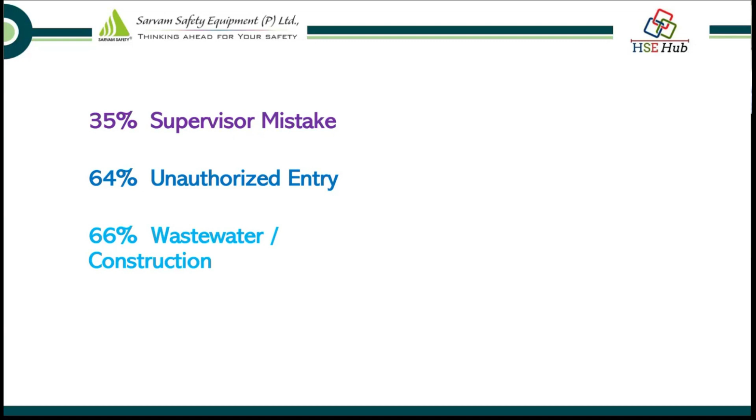64% is unauthorized entry - they are not supposed to enter, but they want to finish some job, so after the job only the production or whatever the company will work. So that unauthorized entry is 64%. And construction and wastewater - wherever the sewage water or water treatment plant - 66% happened at wastewater treatment plants and construction. 78% is a little shocking - oxygen deficiency and IDLH level.

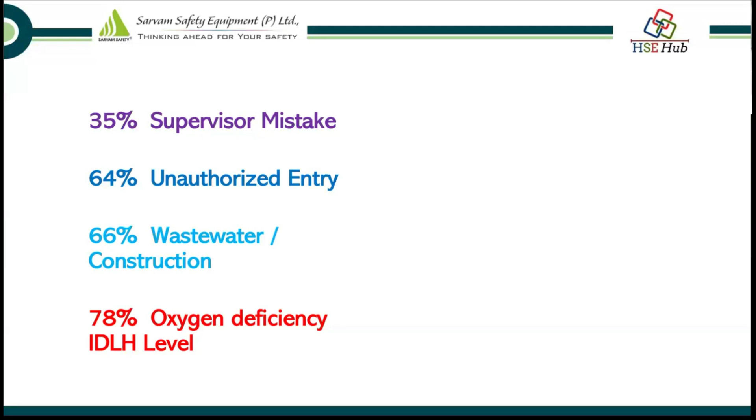So we are going to talk about what is oxygen deficiency and IDLH level, how it affects a person in confined space. And this is one part of the causes - there are other parts of the causes. It may be very simple to listen to, but that is the reality.

Almost 95% - people have died because of not education or poor education, no confined space training. The people who enter confined space must be trained, they must be competent. In fact, our Indian Factory Act also says, section 41A, the person should be a competent person. Competent person is not only certification or papers, he should be really trained to enter the confined space. So 95% it is death because of improper training or no training.

In fact, there are many accidents. I will quote some. There was one hotel near North Madras.

They needed to clear the sewage treatment plant before customers started coming from 6:30 in the morning. So they called some laborers, blue collar workers, early in the morning around 5:30. I will just narrate the incident. Before customers arrive at the hotel, they have to clear the sewage treatment. So around 5:30, 6 o'clock, they were not alert enough while doing the work. Suddenly they opened the sewage treatment, entered the tubes to take out the sewage, but a poisonous gas attacked them and they died.

They don't know what to do. They are very much skilled at their work, how to open the manhole, how to put the hose and all, but they are not aware of the hazards. This happens in many industries. Since people attending are from industry, I don't want to quote any industry openly, but this kind of thing is similar.

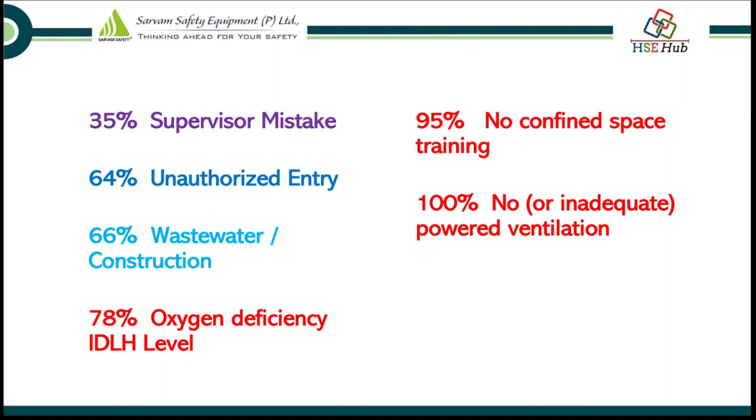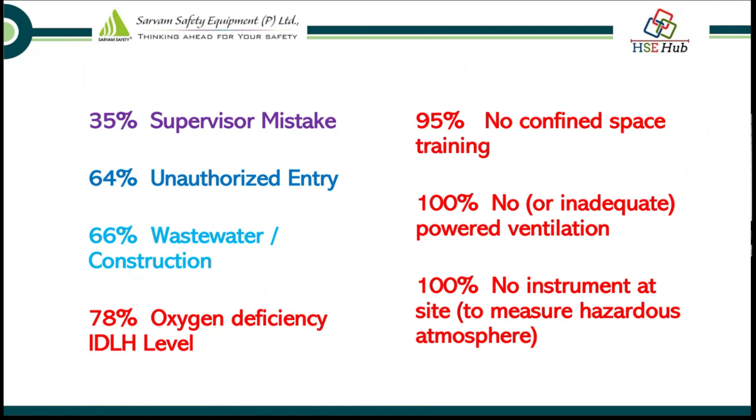100% of cases involve no or inadequate ventilation, and ventilation is very important, we will discuss that further. Also 100% involve no proper monitoring, no instrument at the site. There's no monitoring for oxygen, no monitoring for combustible gases or other toxic gases. These are the major causes, 6 causes, contributing to confined space deaths.

Let's understand the definition. In case you have any clarification, please post it or make a note, and at the end we will definitely discuss it.

Internationally, OSHA classifies the definition of confined space. First, it is a large enough space for a person to enter - it should be big enough, around a 6 or 7 foot person, with their body or 3/4 of the body able to enter into the confined space. Second, it has limited or restricted entry and exit - it is not an easy way to walk in and walk out. Third, it is not designed for continuous operation. So there are 3 clear definitions of confined space: large space for a person, limited and restricted entry and exit, and not designed for continuous operation like a workshop floor or office.

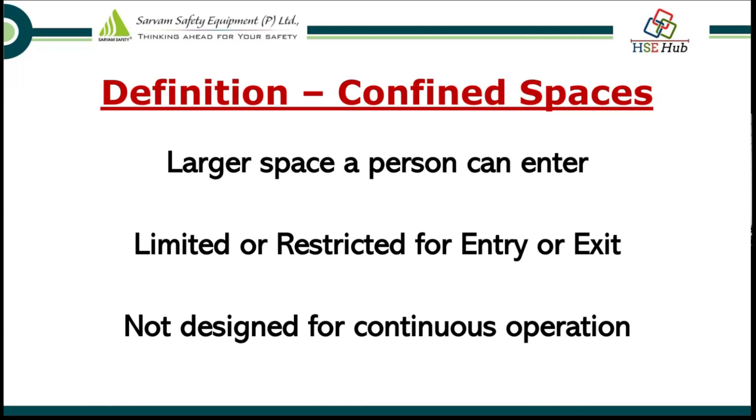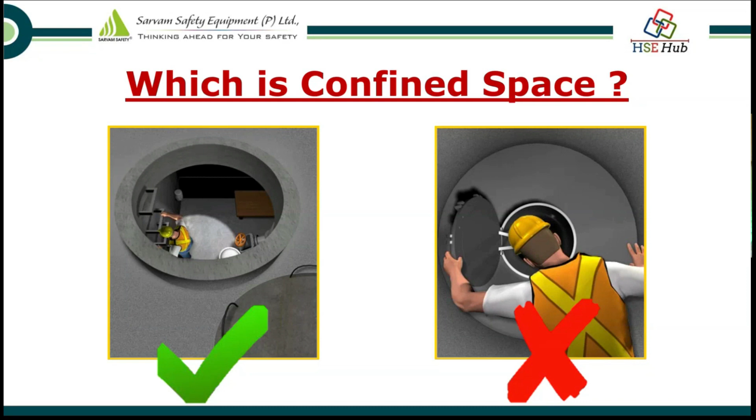Let's see some examples. Here I am showing 2 pictures - one is a manhole, the other is a viewport or process reactor. The left side picture is a confined space because it meets all the categories: it is large enough for a person to enter, there are steps provided, and since it's a manhole with a circular opening of about 1.5 to 2 feet diameter, it has limited entry and exit, and no one works continuously inside. The right side picture is like a process reactor where a person can't enter inside, so it doesn't meet the criteria. This is how we can identify in our industry which is a confined space and which is not.

And in the confined space also there are 2 categories: permit required confined space and non-permit. See, now the standards are very clear. We are at par with the global community, global standard. But if we implement all the things to the entire confined space, what we assume as a confined space, then the process will be very difficult, because not all confined spaces have all the hazards. So they divide it into 2: permit required confined space and non-permit required confined space, right? So that is the thing.

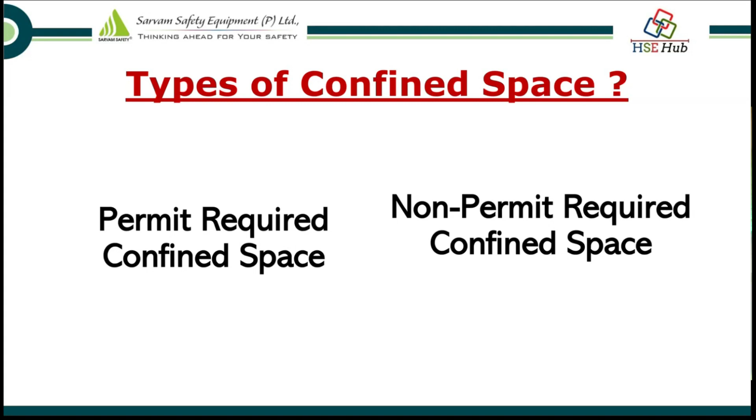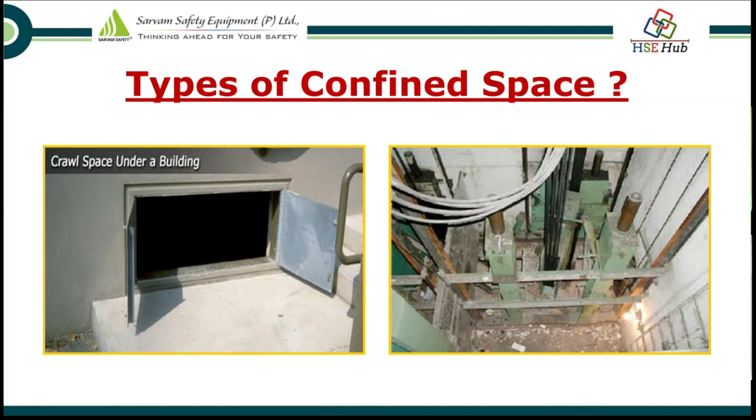So what are the permit required confined space qualities, or what are the criteria? Permit required means highly dangerous, the deaths we saw, that 95%, 65%. Okay. So, it contains the potential to have a hazardous atmosphere. So, what are the hazards? That atmosphere means it may kill a person. That is a hazardous atmosphere. We will discuss a little bit more.

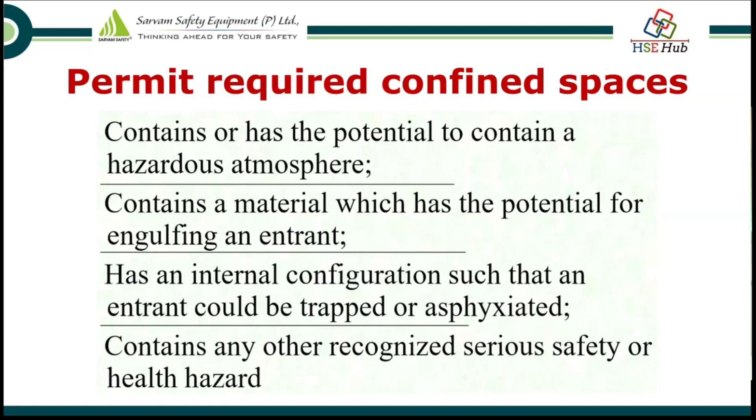And it contains material with potential for engulfment. The person can get trapped inside. The person who enters the confined space is called the entrant, and they may get asphyxiated. Okay, that is, oxygen may be deficient, and there may be other serious hazards. So where there is a health hazard, toxic and flammable, or some creatures like a snake or cobra may get inside, that is called a permit required confined space.

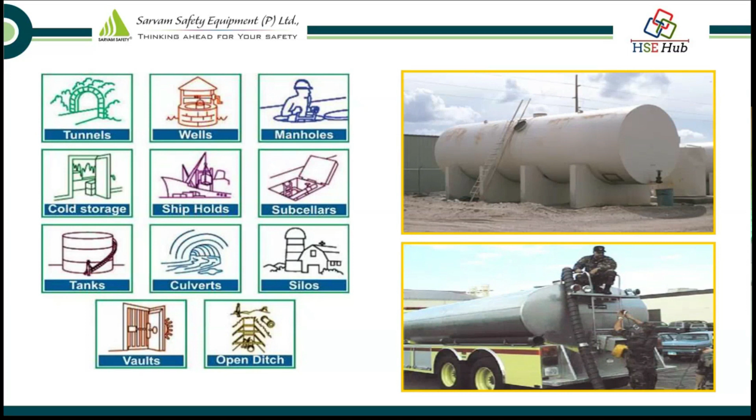So these are the examples: tunnels, wells, manholes, cold storage, these kinds of tanks. So these are permit required confined spaces. Means there is a risk for life and health, not only for the person, but for other persons also. And there are non-permit confined spaces, meaning they do not have that much hazard potential, but we need to have some minimum safety requirement. It will not make a person die. It is not a fatal hazard.

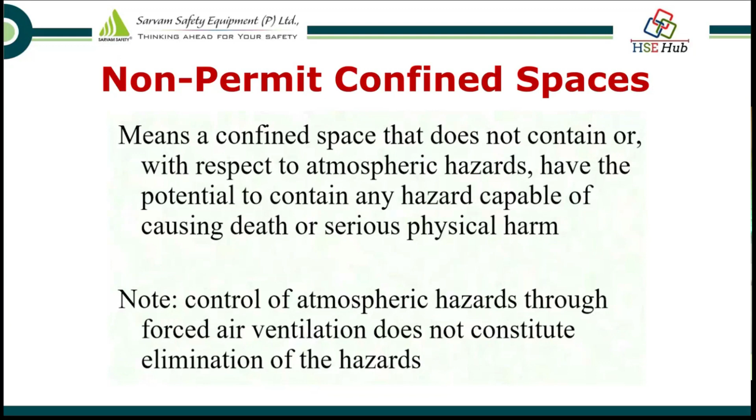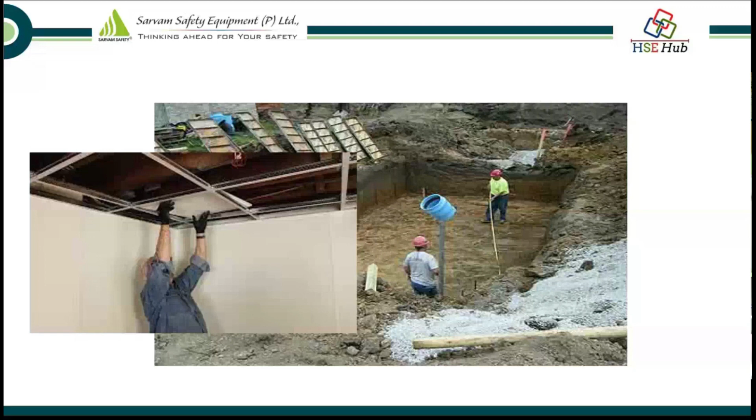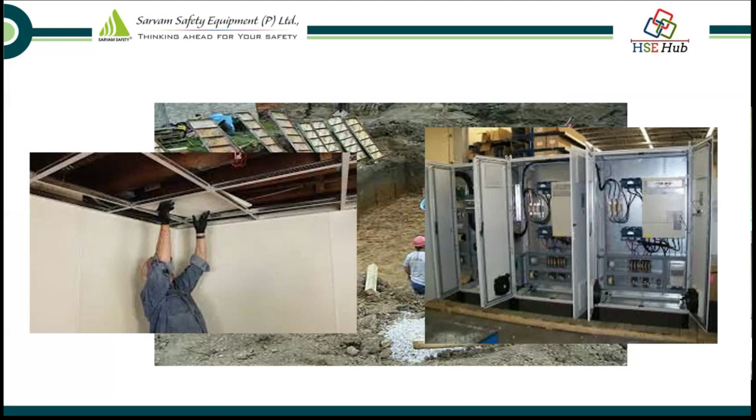So that is non-permit confined space, like this open pit, right? Or false ceiling. Where we go inside the false ceiling and work, that is also confined. Confined means it is completely covered, but it does not have the health hazard to the extent a person can die. Again, like a large electrical panel, I'm just showing for an example. So even though it is confined and closed from all directions, it is not highly dangerous for the person's health. So this is called non-permit required, meaning not much monitoring is required; with a minimum safety setup, we can enter. That is it.

Okay. Now this is a very critical question. I hope till now you are very clear. We understood what confined space is. We understood the types of confined space. Now this is the question: what is meant by confined space entry? Whether the person is near or inside. I'm going to show three pictures, which will make it very clear.

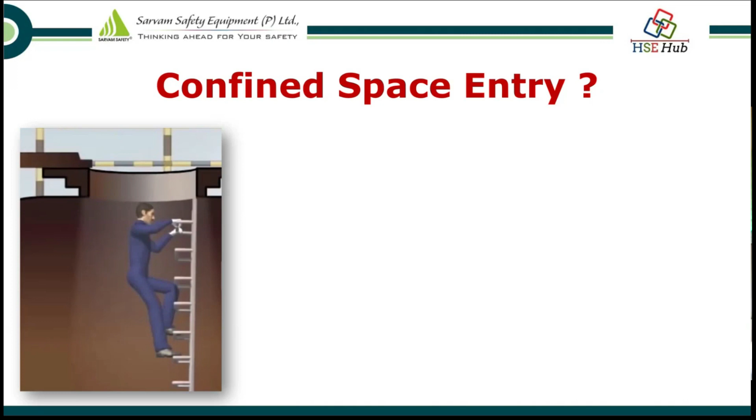So very clearly, as per standard, all three should be considered confined space entry, because all are vulnerable to get injured in the case of a permit required confined space. If a person enters fully, if a person enters half, or if the breathing zone of a person is on the opening of the manhole, it is also considered a confined space entry. So when our team has such work, whatever protocol is required for the first person, the same needs to be applied for all the rest of the people, right? So this is the clarity about confined space entry.

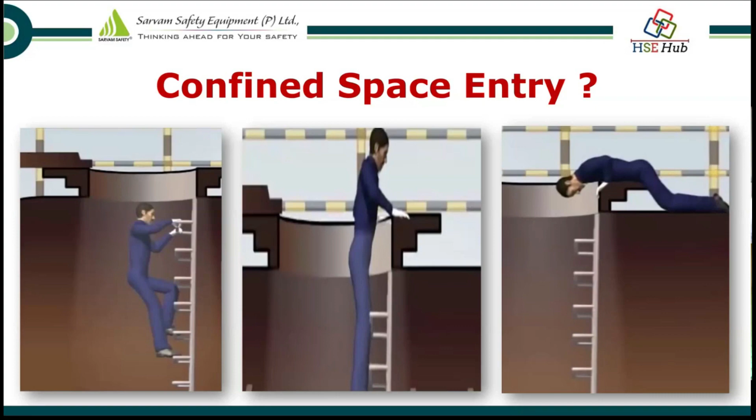Now let's watch one video, and I hope you can watch the video very clearly. There is not much audio, but just watch the scenario. Most confined space accidents follow a similar pattern. Okay, right? I'm going to play the video. Please have a look.

So this is typical of things that happen in almost all cases. This is a similar pattern where a person will go in without any protection, and then the other person will go. So the confined space has many hazards and is associated with risk.

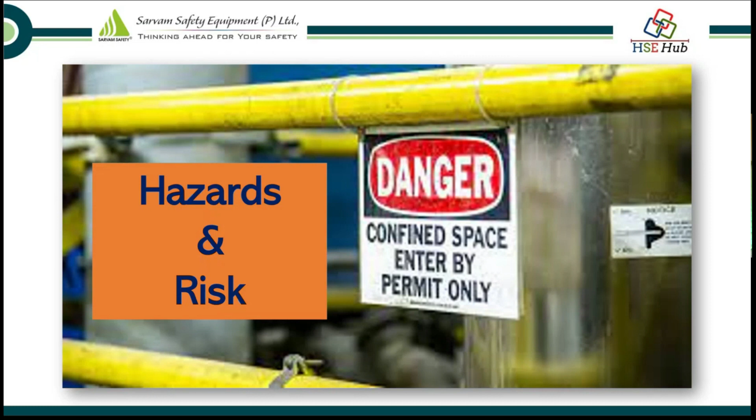It is very important to note that the people had not entered inside; they were taking rest, but suddenly the ETP tank broke and the people died. So confined spaces and similar areas, ETP, STP, all have very life-threatening hazards and associated risks. Let's see them one by one for another 15 to 20 minutes, and after that we go to the suggested solutions. The first one is oxygen deficiency. There is a high potential a person can die.

Why and how is oxygen deficiency happening? It is displacement of oxygen. Inside the confined space, if there are any gases already created whose density is more, they will displace the oxygen. And microbial action: inside the confined space there may be small microorganisms, which also create some sort of gases, or consume the oxygen, or displace the oxygen.

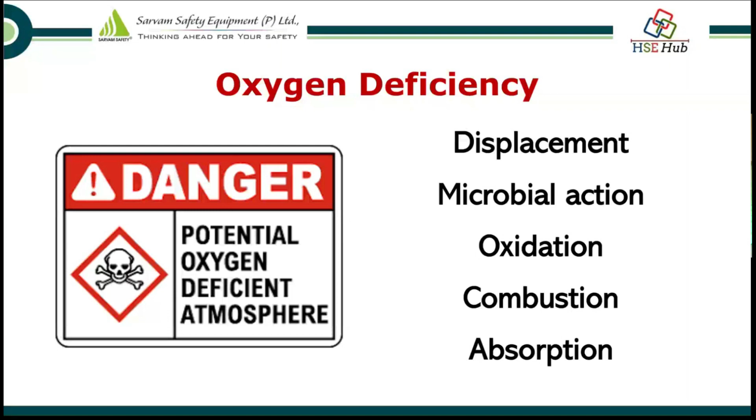Oxidization of metals. And sometimes a confined space or any area which was closed for a long time will have its own gas formation, like methane gas or combustion gas. Sometimes oxygen will get absorbed. So oxygen deficiency is one of the biggest hazards in confined spaces, and it is killing people like anything.

Here the problem is the oxygen may be at the surface level. There were many old techniques to check the oxygen, like sending a small frog or a small chicken inside the confined space; if the frog or chicken lived, then definitely there was oxygen. But those were traditional techniques followed around 30 or 40 years back. Now the latest instruments and a lot of technology updates have come.

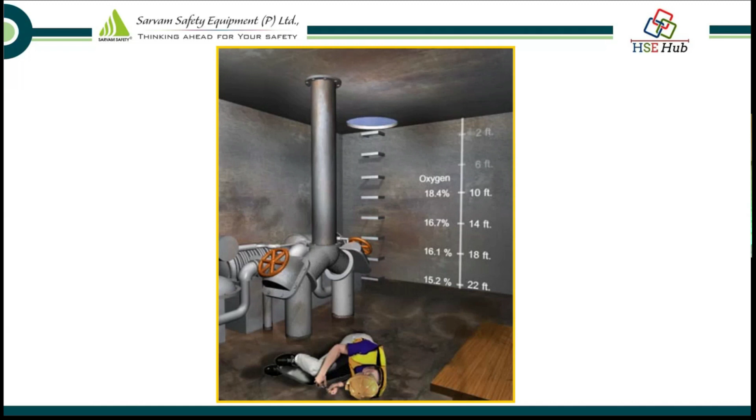Why we need to take great care with oxygen deficiency is that on the surface, on top of the confined space, it may look like 21% or 22% oxygen. The minimum required oxygen for a person to work stably is 19.5%. When the person enters the confined space and slowly goes down into its depth, the level of oxygen will come down. That is why people are not able to live, and people are dying.

Now we see this picture. At 21% oxygen, the person will be normal; he can work and perform. When it is reduced to 18%, the area temperature will feel increased, he will not be comfortable, and his concentration will be disturbed, so he may need more air or ventilation. When it is reduced to 16 to 12%, the breath rate will increase, up to 25 per minute, and naturally when breathing increases, the heartbeat also goes up. So that is the problem.

The person will not be stable, and below 14 to 9%, he will get headache, nausea, a vomiting kind of sensation, and he will not be comfortable at all. And at less than 6%, the person may die. So this is the impact of oxygen deficiency on the body. To be stable, we need a minimum of 19.5% oxygen.

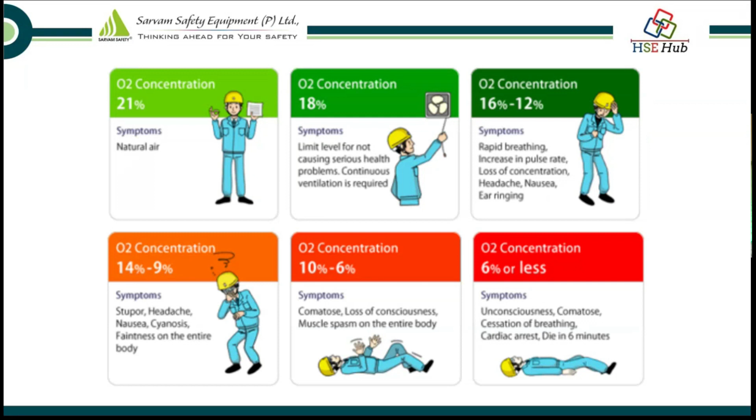So oxygen deficiency is one of the hazards in a confined space. When we are planning a solution for that, we will also plan a solution for the other thing: if the oxygen is increasing, that is also dangerous. Like oxygen deficiency, it is invisible, it is silent. It can create a physical hazard, and it can create a health hazard also. And how can oxygen deficiency happen? The confined space is already covered, and due to microbial activity or other reactions, oxygen will get absorbed.

Then how can oxygen enrichment happen? It is because of wrong ventilation. When we want to ventilate, we need to pump only fresh air into the confined area. But instead of fresh air, if you use oxygen, that area will become an oxygen enrichment area. If there is a sudden small spark or some temperature increase, it can create an explosion. That is the physical one.

And what is it likely to lead to for the person? For a normal person, 100% oxygen will increase the respiratory rate. Just imagine the person's neurons get more oxygen, so they work in a rapid way. So the person will not be stable to work. So one, it will create fire and explosion. The other thing, it will also disturb the person's regular, stable activities. So that is oxygen enrichment.

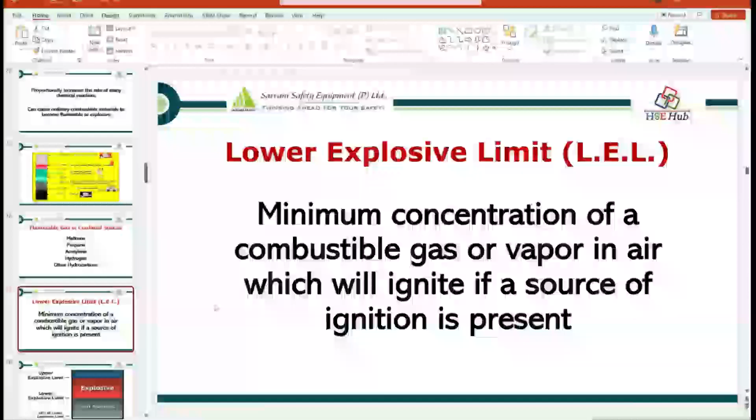Oxygen enrichment. I hope oxygen deficiency is very clear; that is a lack of oxygen. Oxygen enrichment is a sudden increase of the oxygen level in a confined space. So how will it increase? It will not happen naturally; it happens if the ventilation is done in a wrong way, like if we ventilate the confined space with oxygen. So what will happen? If the entire confined space is filled with oxygen, initially it may be comfortable for a person, but at a later stage it will not be comfortable.

What will happen to the person? When a large amount of oxygen, 100% oxygen, enters a person's body, the neurons and cells will be hyperactive, right? So the person will not be stable to take action. He can't speak properly and he can't do any action properly. If it reaches 100%, the person will die. Again, I'm talking about a normal person. A normal, stable person with 100% oxygen may die. Brain death will happen.

There was one movie called Lucy, a French movie. It is actually a different genre, but similar to that: when all the brain cells are activated, what becomes the problem? If someone has watched the movie, we can just relate to that. That is hyperactivity for the person.

What will happen to the atmosphere? When oxygen enrichment happens, a small spark will become 10 times bigger. And in case of any flammable liquids, if somebody has taken petrol or a flammable gas inside for some reason, when the oxygen atmosphere is 100%, it can create an explosion.

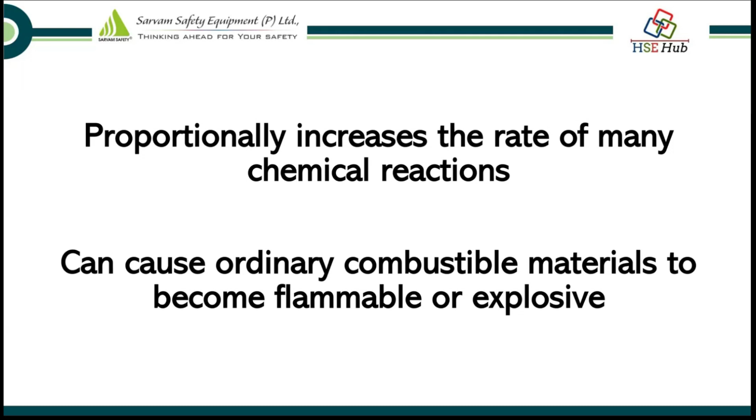Okay. So this is how the oxygen level plays with our body physically also. 19.5% is the minimum oxygen required to perform a task. 21% is normal, that is the atmospheric percentage. Up to 23 it is okay. Up to 25 it will increase the risk of fire, and 100% will damage the brain.

When it is reduced, around 16% breathing will be high, at 12% the person will go unconscious, and below 12% they may reach the coma stage. So that is the problem of oxygen enrichment and deficiency. Hope now it is very clear. Now let's move to the flammable gases. If you have any queries on oxygen, we will discuss at the end.

The flammable gases may get accumulated in a confined space: methane, propane, acetylene, depending on the process. If some area is processing some chemical, hydrogen may get produced. If it is a petrochemical industry, wherever there is a confined space, methane will be the byproduct or a natural formation. So these are the flammable gases in confined space.

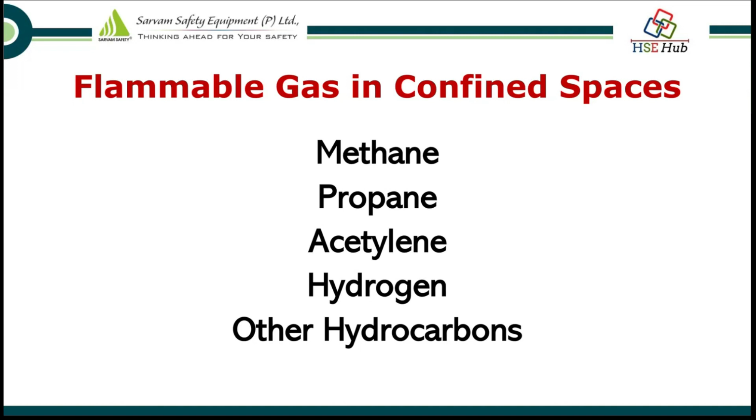What is the problem with the flammable gases? There are some flammable gases with less density, which will be on the top. There are some flammable gases or even toxic gases with high density, which will settle down. So one, there is a risk of fire or explosion, and the other problem is when these flammable gases expand, they replace the oxygen. So that is another problem.

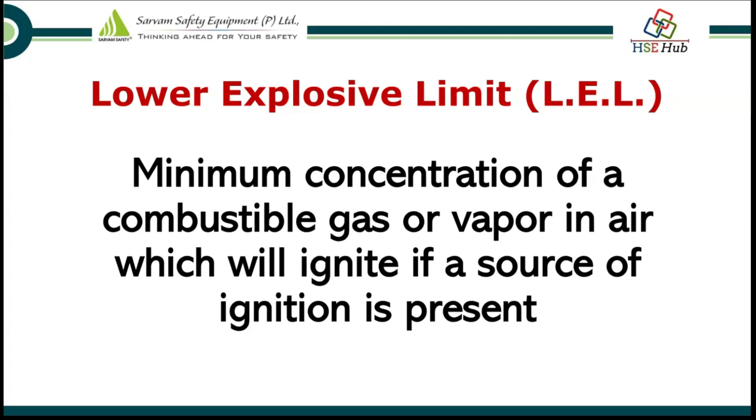And how can it catch fire? There is a lower explosive limit. I hope many of you are aware of it. It is the minimum concentration of a combustible gas: when the flammable gas level reaches the percentage where it can ignite a fire with a heat source. Let's understand a little bit in the next slide.

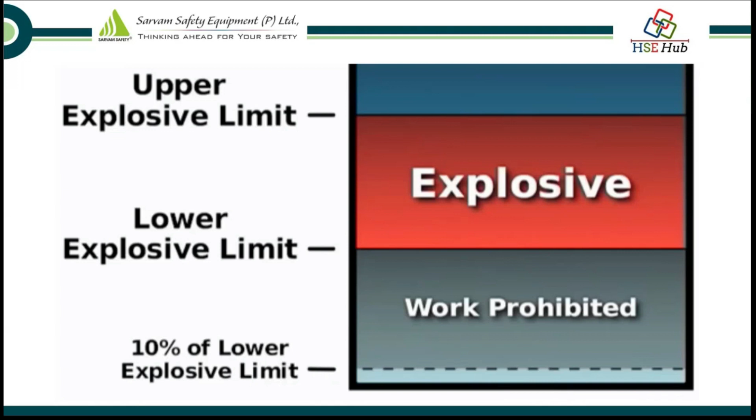Apart from oxygen deficiency and flammable gases, there are some toxic chemicals, first hydrogen sulfide and carbon monoxide, in their different concentrations. To take it in a simple way, all toxic chemicals or toxic gases have 3 different levels. In the first level, we can sense the chemical, meaning we will get a smell. That is called the odor threshold. There is no harm; a person can work without protection for one shift, 8 hours.

Second level, when it reaches the threshold limit value, TLV. When it reaches TLV, the right protective equipment like a respirator is definitely required. Below TLV, not much protection is required; above TLV, protection is definitely required. And the third level is IDLH, immediately dangerous to life and health, meaning the person will die.

So here in confined space, the problem is, see, a confined space has a depth of 8 feet, or 15 feet, so that a person's full body can enter. At the initial surface, the toxic gas level will be very less.

So even if they measure at the 15 feet confined space vessel, if they take the measurement even up to 13 feet, there were no noticeable toxic gases or they are within the limit. But if there is some other sediment or semi-solid liquid at the bottom, if the sediment is disturbed, it will immediately release gases, vapors or toxic fumes above the limit. So that is the problem with the toxic confined space atmosphere.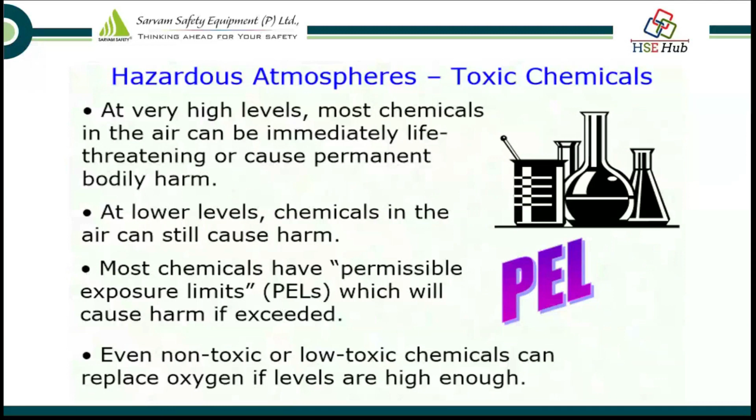See, like a sewage, why are people dying at drainage and sewage? On the top, it looks normal. When they go down, they will feel a little heat, they will adjust. When they go further down, they will get some different discomfort, they will adjust. When they touch the water and disturb it, suddenly the toxic gases come. The person is not prepared for that, and the person will die. So that is a toxic chemical atmosphere in a confined space. And one such toxic gas is hydrogen sulfide.

In fact, for manual scavengers, latest technology has come; they are using tripod and winch. Around 8-9 years back, the government announced that manual scavengers doing sewage cleaning have to wear proper protection equipment. In fact, in Tamil Nadu, all the districts implemented it. I don't know what happened after that. They use electronic gas monitors and advanced breathing systems, because many people have died due to hydrogen sulfide inhalation.

Now let's understand a little bit about hydrogen sulfide. Hydrogen sulfide is everywhere, even in our kitchen waste and food waste. A popular example: when you go outstation for a week, you close all doors and windows. After one week, when you come back and open the door, you will feel a different kind of odor. That may be hydrogen sulfide, created if the kitchen or food waste is not disposed properly. At a small stage it will not create problems, but when the level of hydrogen sulfide increases, it will create a lot of issues.

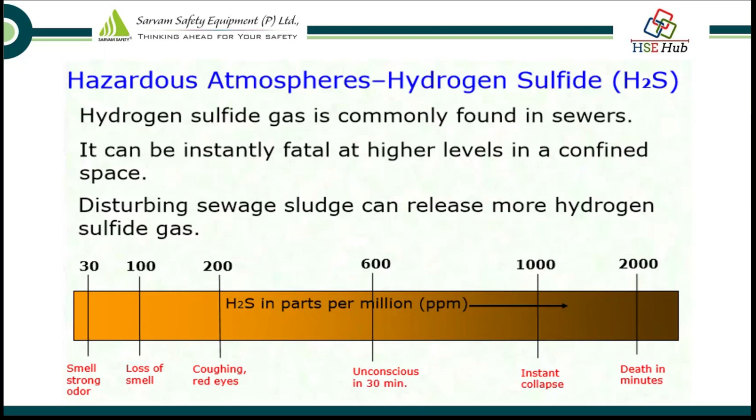Similarly, there are other toxic gases like carbon monoxide. Carbon monoxide is also one of the natural creations in confined spaces. Again, it will displace the oxygen. The problem with CO, carbon monoxide, we know very well - there is no smell for it, and we can't recognize its presence.

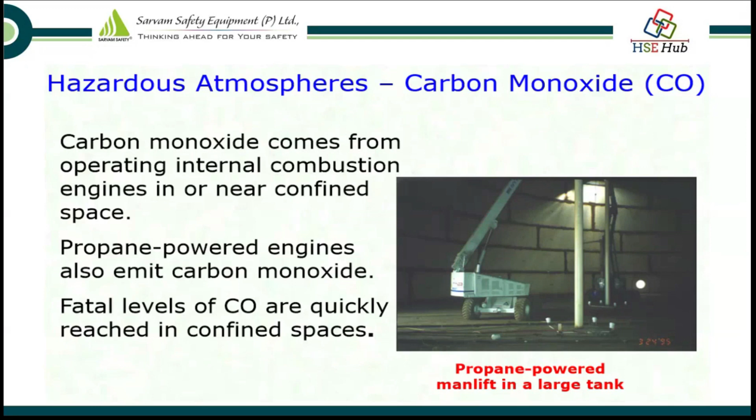So what will happen if a person goes in and continuously gets attacked? There's oxygen deficiency, toxic gases, and also a temperature increase inside - that is the confined space. So the person will collapse immediately.

Again, these are the major hazards. So depending on your operation, depending on your industry, the percentage of toxic gases will be different.

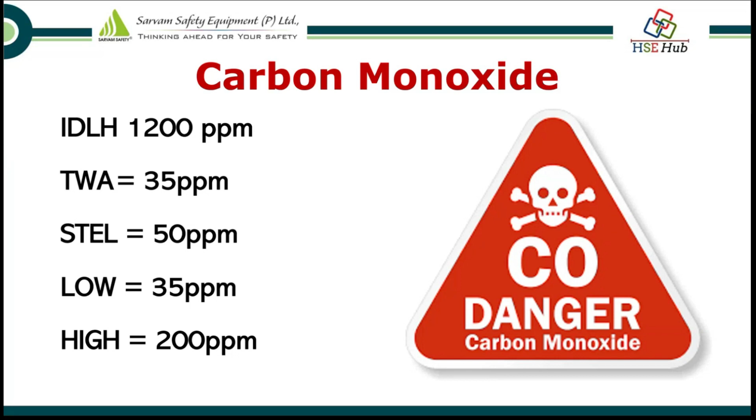So the IDLH of carbon monoxide is 1200. The minimum level is 35 ppm. If it is more than 35 ppm or 200 ppm, that is a risk for the person.

Now this is a very important slide. You need to understand how toxic and flammable gases get layered in the confined space. Methane is lightweight, ammonia is lightweight, so they will always be at the top - that is the vapor density, less than 1. H2S and carbon dioxide and gasoline fumes and other fuels are heavier than air, so that is more than 1, and they settle down.

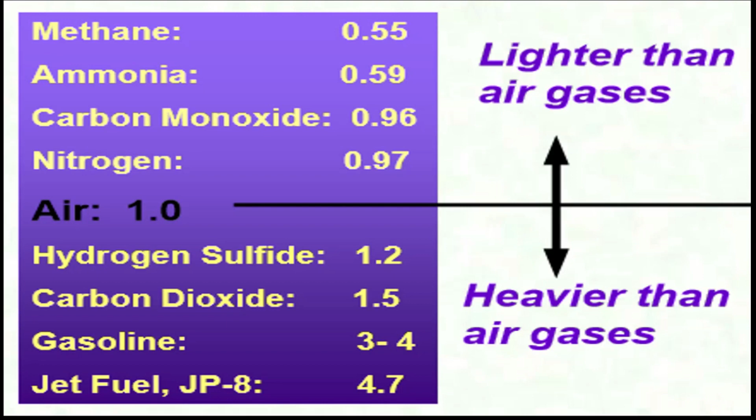So whenever we have to take a gas measurement, we have to check at all levels. This is the problem - this is the real scenario of the confined space. The lighter gas will accumulate on top, and heavier gas will accumulate at the bottom. So we have to check the entire confined space throughout its length.

And there are other hazards like engulfment hazard, where a person gets trapped - it's like in a silo. In silos, if a person enters and there's any weak platform, the person may get engulfed in the confined space. Then locating the person itself becomes a very big challenge - people can't escape and they will die. So this is also another hazard.

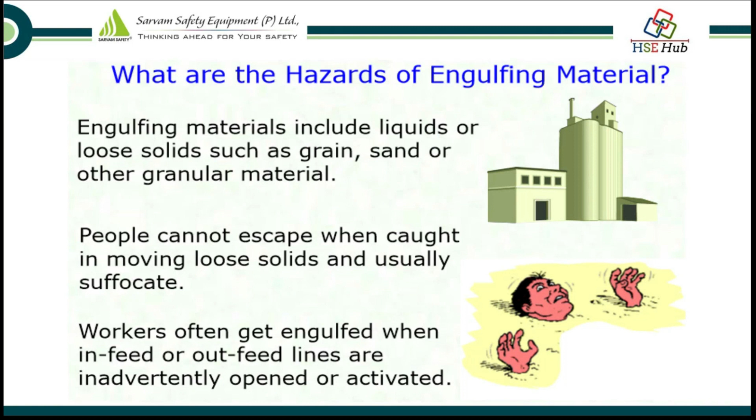And electrical hazards, excess heat, and there may be some insects also like snakes or cobras inside. These are the other hazards in the confined space - these are all the killing factors. I hope I made it very clear about the hazards and risks associated with confined spaces.

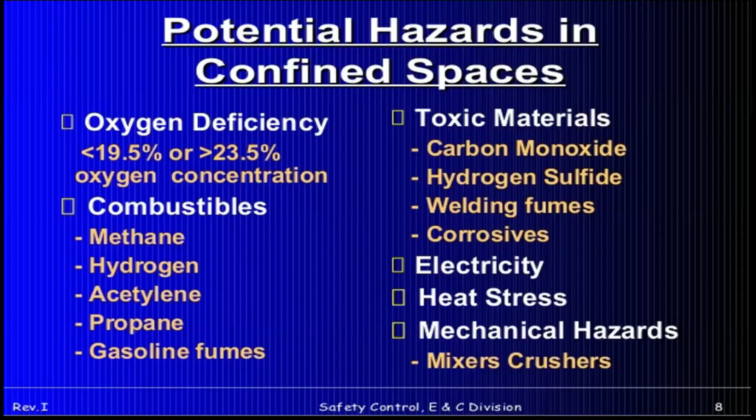Now we need to go for a solution - how we have to prepare ourselves, how I should make a plan to enter into a confined space, and how I can send a person in safely and welcome them back safely. Entry and exit should be safe.

There are many standards, and popularly OSHA 1910.146 is the permit-required confined space standard. It says very clearly, and also our Indian Factory Act section 41, it also says a lot of points. So I merged both OSHA's and the Indian Factory Act section 41 - you can go and check it out.

So this suggests establishing procedures and practices always - it's like a work permit system, so definitely we do that. Without a work permit, we will not allow a person to enter. And we have to train the employees in 3 levels. I will share with you what those 3 levels are.

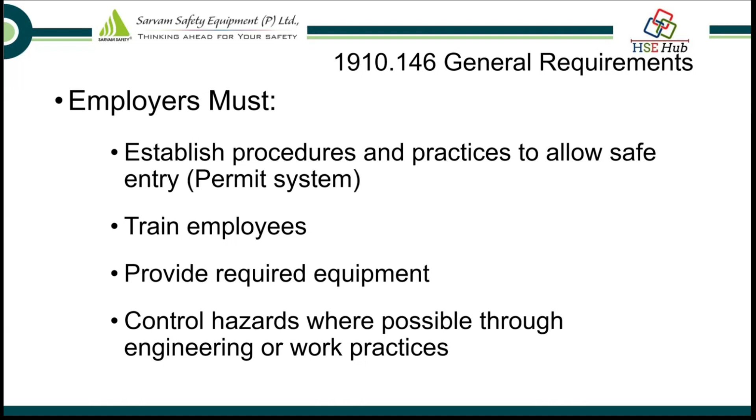And provide required equipment - this is very important. If the person may be competent knowledge-wise, he is perfect - if you give a question paper, he will score 100 out of 100. But that is not the thing - he should be able to use the equipment competently. To use the equipment, we have to provide the right equipment. And during the operation, we have to control the hazards also. So these are the basic general requirements as per OSHA, and in fact our factory act also says that.

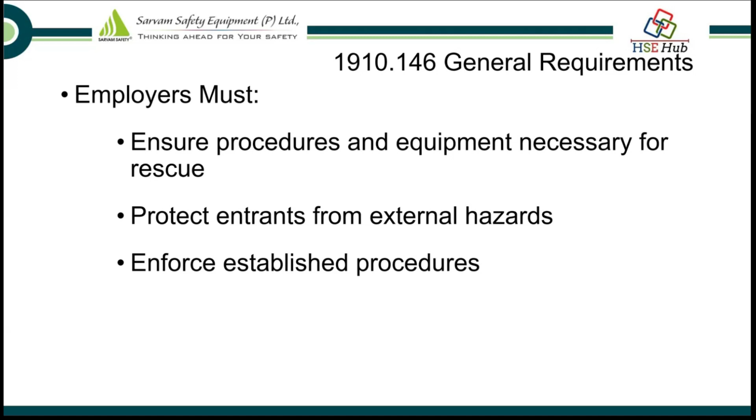Risk assessment is also very important. Ensure procedures and equipment necessary to protect the entrant from external hazards, and enforce the established procedure. Then the employer must provide all the facilities required.

Testing and monitoring, right? That means testing and monitoring for toxic gases, oxygen and flammable substances. Proper ventilation is also needed - there is forced ventilation, positive ventilation, and negative ventilation, which we will see.

Communication device - if someone is inside and something happens to him, how will he communicate outside? That is also a challenge. Proper lighting is needed, and the place should be barricaded so other people do not enter.

Proper PPE - the person who enters inside should have one kind of PPE, and the person monitoring from outside should have another kind of PPE. So other PPE, and rescue, are also very important.

You provide everything - I trained the person, I gave all the equipment - but in case something goes wrong, how to rescue the person? In fact, in recent developments, there are rescue teams available.

If you are doing confined space work in your industry, you need not worry - you can call the rescue team. If the confined space work is taking 2-3 days, the entire rescue team will be present at your factory. In case something suddenly happens, the rescue team will go inside and save our workers.

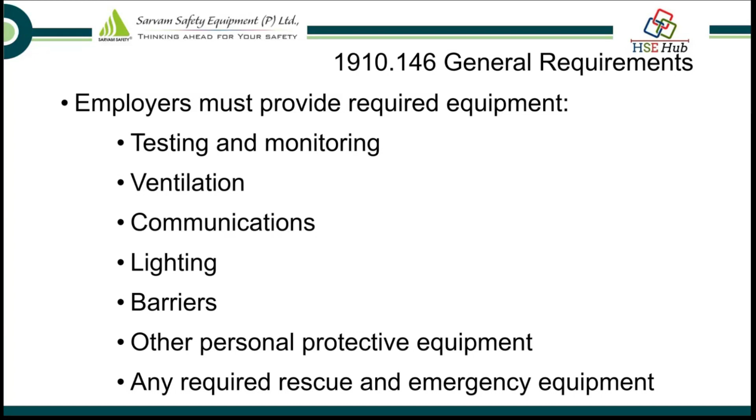That much competent people are available. Even in Chennai such people are available. So we can discuss this at the end.

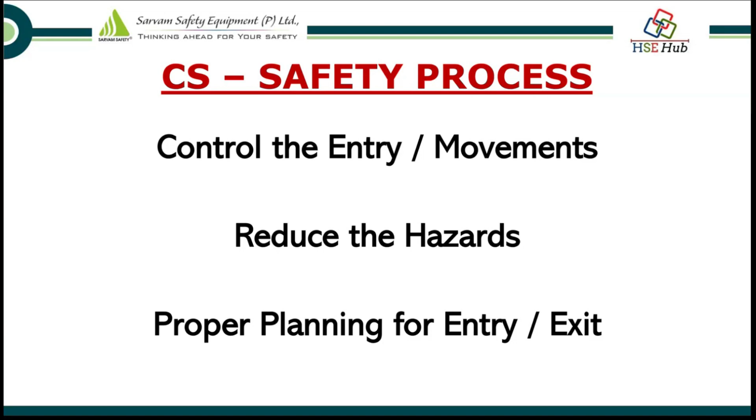To make confined space entry a safe process, three points are required: control the entry movement, reduce the hazard, and proper planning for entry and exit. What does this mean, and how do we control the life risk?

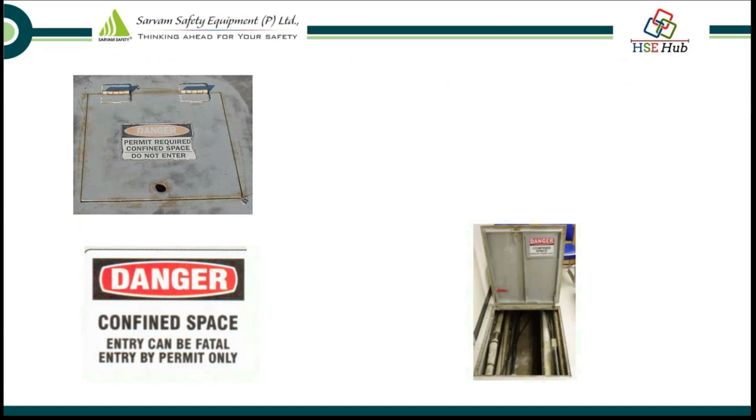We have to prevent unnecessary employee entry. How do we prevent it? Put up a sign, install a proper door and lock, and even implement a lockout-tagout system. This way will help prevent unauthorized entry.

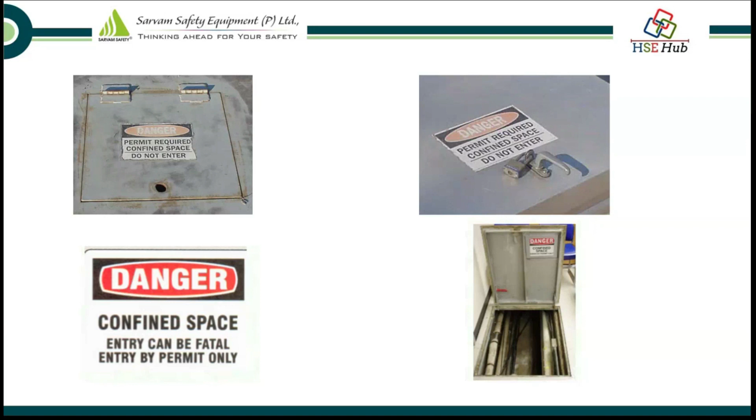You saw the causes for accidents, right? 64% of deaths happened because of unauthorized entry into confined spaces. Now, how do we reduce the hazard?

Second, before entry and after entry, to reduce the hazard, ventilation is very important, and atmospheric monitoring is very important. The challenge here is how to ventilate the area.

Natural ventilation will definitely help. There is what's called natural ventilation and vertical ventilation, and there's a practice for this. I think many industries have improved now.

There is a practice, like in manhole cleaning, where they open the manhole for 48 hours - 2 days or 1 day, for example. While it's open, natural air will go inside, and whatever toxic or other gases are present will get ventilated out. After 1 or 2 days, I can send a person inside.

So natural ventilation will not work for a horizontal space, but it's okay for something vertical like a silo. You have to open the top one, and open 2-3 areas at the sides and middle, so the air goes horizontally and turns like a centrifugal motion, going vertical. That's how the ventilation happens.

What is the meaning of ventilation? Fresh air should go inside, and from inside, the hazardous air should go outside. That is called ventilation - the proper inlet and proper outlet.

This is possible only through forced ventilation, like using a blower. Natural ventilation will not be the right solution to reduce the hazard. Again, we have to check and ensure whether we have ventilated properly.

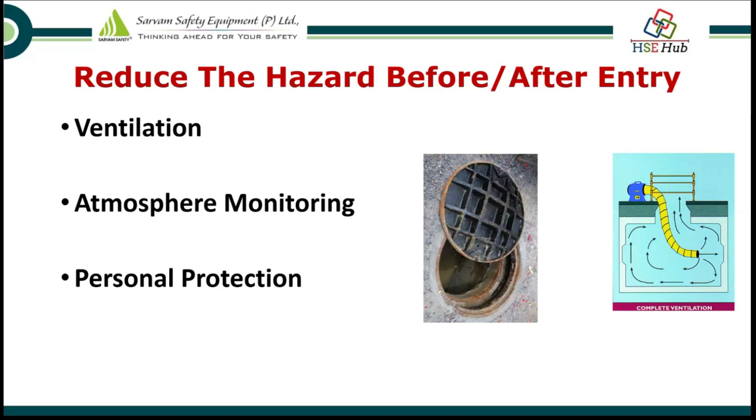We have to monitor the atmosphere - atmosphere monitoring is also very important. Then, personal protective equipment - in spite of doing ventilation and monitoring, PPE is very important, right? I hope you are very clear now on how to reduce the hazard.

Then what other planning do we have to do? We have to plan for proper manpower, control equipment, safety equipment, rescue equipment, and medical emergency provisions. Again, it's very simple, so you can understand clearly. For manpower, we have to plan for 3 types.

The entrant is the person who physically enters into the confined space, and he must be trained on all the hazards and how to use the PPE properly, and in case of any problem, how to respond.

The second person is the attendant, who will watch the entrant. He has to frequently communicate with the person, be aware of the location and environment, and know the next protocol, like a communication matrix.

The last one is the entry supervisor. The supervisor handles the overall operation and is responsible to get the permit, provide the safety system, and can take additional responsibility of getting the rescue, right? So risk assessment and ensuring a proper, safer place, and all the paper documentation is the entry supervisor's responsibility.

Apart from this, you can have a risk assessment team and safety team. That's all, so it's up to you, depending on your industry. Definitely you will be having many things.

So typically 3 manpowers are required for entry. And if the work is going for 1 day, the entry supervisor has to visit frequently to check whether the process is going as per the system.

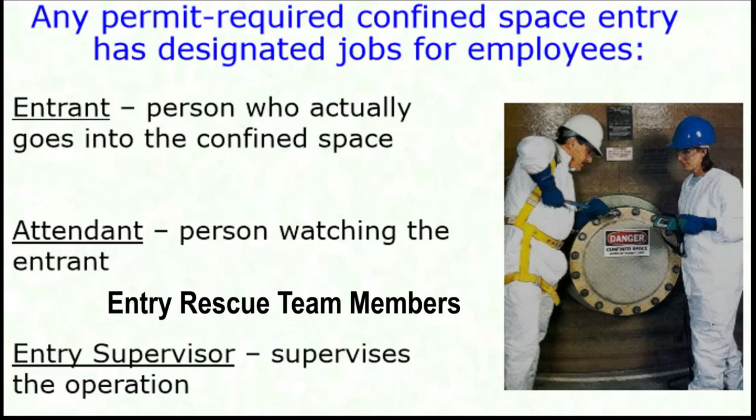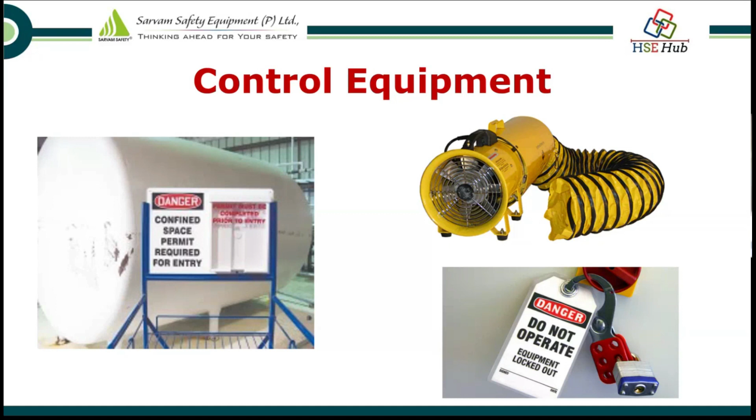So this is an example. Depending on your area, you can plan.

Ventilation means forcing fresh air inside, so it is the right one. It has got positive pressure ventilation, so it will go inside with pressure, mixing all the gases, whatever the air, and with the other hole it will send the air out.

So inside the confined space, normally the ventilation will be maintained with proper oxygen. It will also reduce the temperature. Again, ventilation is not only before the work—during the work also we have to ventilate.

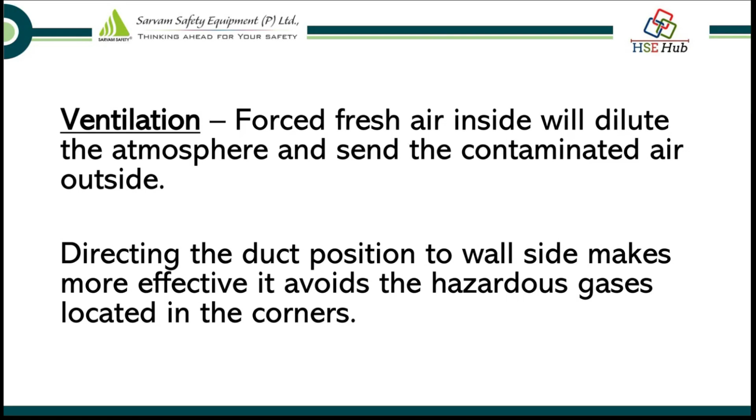The other method is called extraction. Extraction means we are using a negative method—we are pulling the air from the confined space. This is not an effective method because in between the confined space, the toxic gas may get trapped in a corner, so the contaminated air will not be removed 100%. So extraction is not the right method, only ventilation.

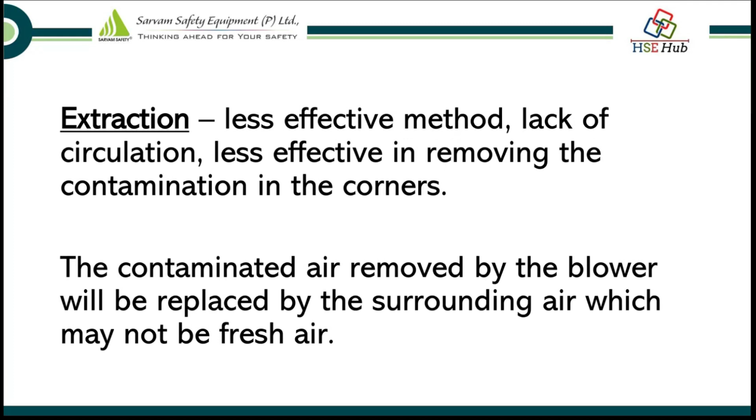Here the question comes—many people ask me whenever I go for training, audit, or consulting, how many times do I have to ventilate? Ventilation is a continuous process, but before sending the person inside, there is some best practice. With my knowledge, the standard OSHA and others are not very specific on it, but best practice followed by industry recommends ventilation from 6 times to 20 times. We will discuss later about calculating this.

So non-technically speaking, if there is a 1000 cubic feet tank, we have to fill that tank for 6 times—meaning 6 times the cubic feet of air should go inside the tank to maintain proper ventilation. Only after that do we need to send a person to work. So that is 6 to 20 times.

It depends on the risk area—if it is a chemical or pharmaceutical industry, 6 times may not be enough, maybe 10 or 15. So the circulation of air should be minimum 6 times the confined space capacity.

So say if we have a 1000 cubic feet tank, and we have a blower which delivers 1000 cubic feet per hour. To fill the 1000 cubic feet tank, we have to run the motor or blower for 1 hour—one time to fill the tank takes 1 hour, so we have to run the blower for 6 hours. If it's taking 5 minutes to fill the tank, then we have to run the blower for 30 minutes. So that's a rough idea, not technical, roughly 6 times displacement.

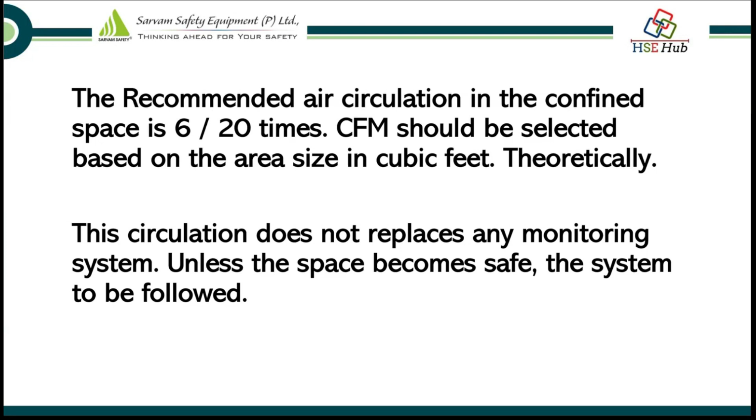And the monitoring system—again, for the entrant who is going inside, we have to provide oxygen monitoring.

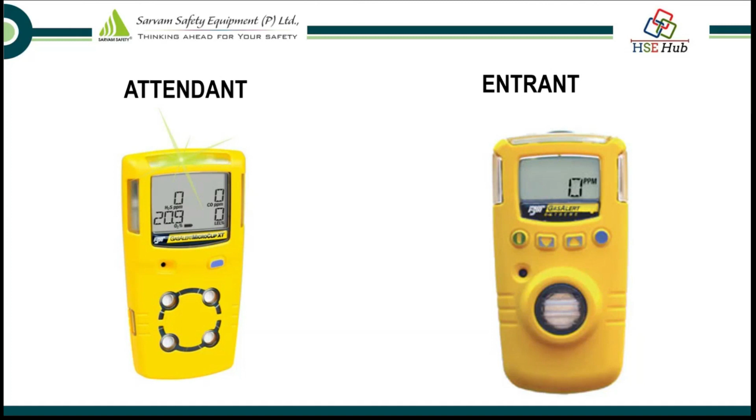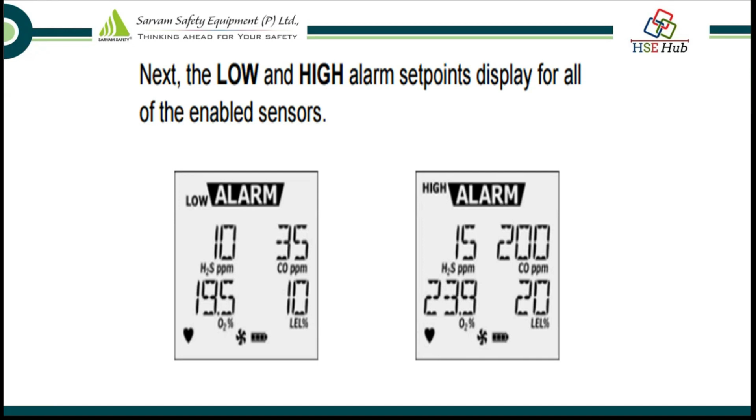And before sending the person, we have to monitor 4 gases with a multi-gas detector. So we have to use this kind of gas monitor. Now a lot of advancement has come, so it will give a low alarm and a high alarm. If you are having the 4-gas monitor, it will monitor oxygen, carbon monoxide, hydrogen sulfide, and flammable gases. At low alarm, it will beep. And the high alarm is like a fire siren. Okay. So the person has to come out immediately. So these are the alarm systems.

Right? I think someone has unmuted the mics. Team, please mute your mic so that others will not get disturbed. And sir, stay focused on this slide.

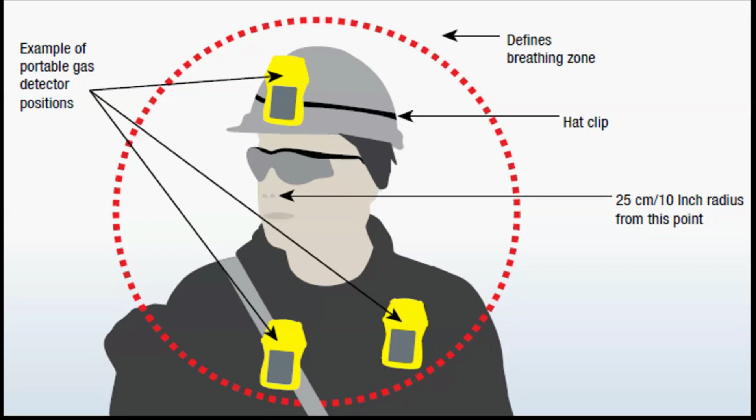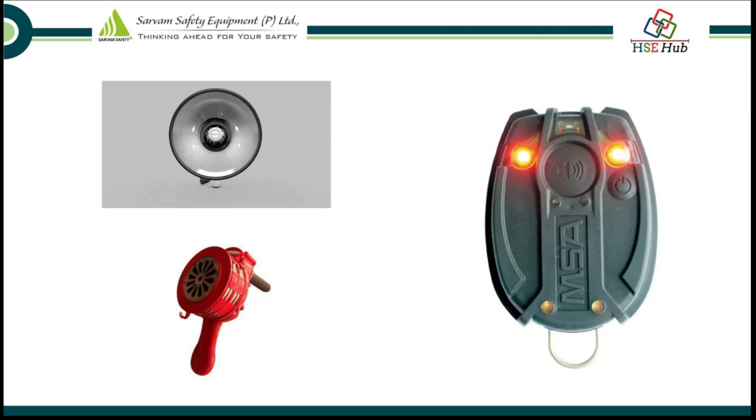In case inside he is completely fainted, if he is totally unconscious, if there is no movement in his body for 20 seconds, it will give a high alarm of around 140 decibels. So are you getting my point? If there is no motion, no movement in the person's body, it senses it and gives a signal. The person on the outside is called the attendant. The attendant will take the next action. So these kinds of warning and safety equipment we can have.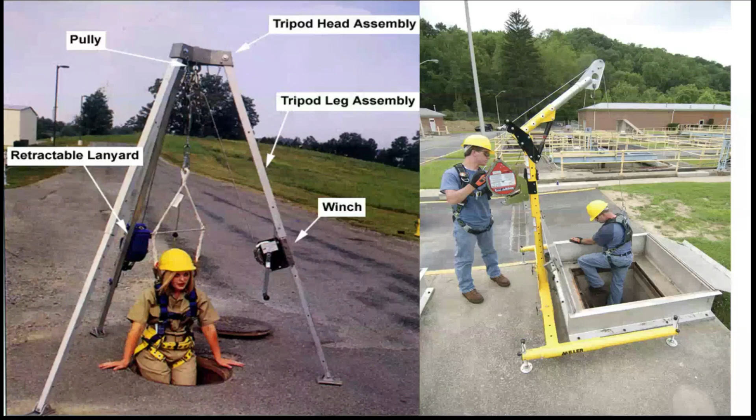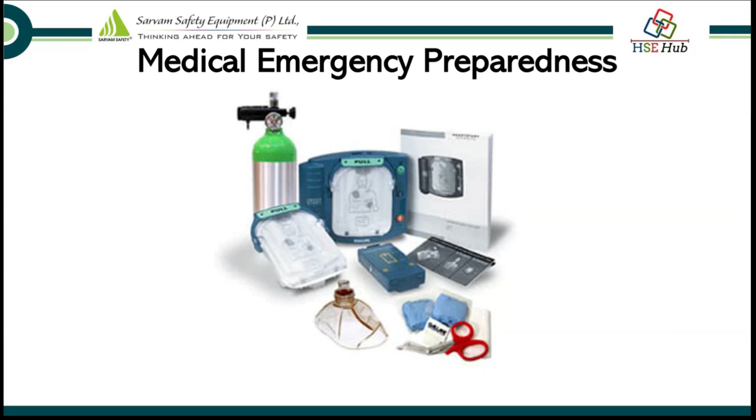And in some confined spaces, we have to use a flame proof torch, because inside there may be formation of flammable gases, but all this is required along with continuous ventilation. Nowhere in the middle of the work should we stop ventilation. It is very important, right? And rescue planning, like a tripod or winch or cantilever. And finally, medical preparedness. In case something went wrong, if a person is rescued, what should we do? We have to give oxygen, defibrillation, or CPR. An ambulance should be ready. If it is critical work, definitely we have to prepare with the ambulance and other things.

So to summarize how to make a safe protocol of entry and exit of a confined space: first we have to barricade the area so that we limit the entry. Then we have to monitor the area with proper gas monitoring devices. When it is okay, then we have to ventilate the area. First we have to ventilate 6 times. After that we send the person. After the person has gone inside, we continue the ventilation. Then we should send the people with proper PPE and emergency equipment, meaning alerting equipment like a no motion sensor, then lifting and lowering rescue devices and medical emergency.

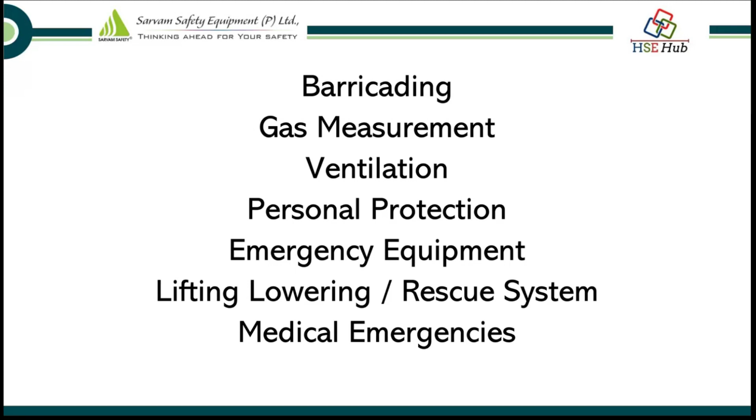So I just combined all the standards and made it simple. Right? If you need more detail, you can go and refer to the standard. Okay. So this is the confined space solution, sir, on how to encounter confined space work. Right? Yes.

So let me check the questions. Anything there? So with that, we are at the end of the presentation. Hope you got a clear idea about what a confined space is all about, what hazards and risks are associated with the confined space, and what is the right protocol to enter.